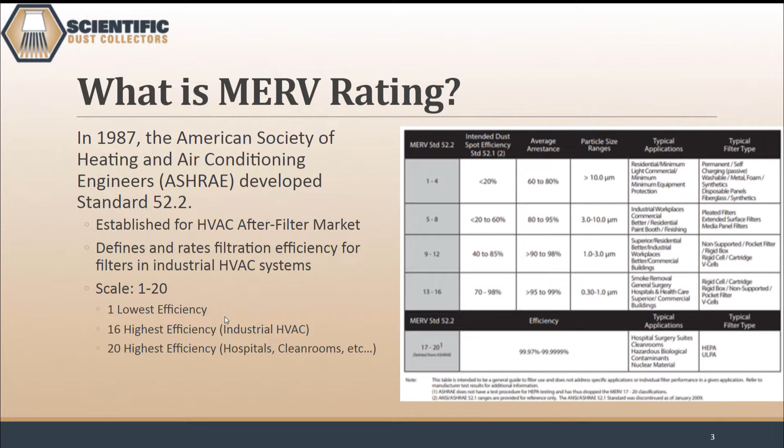In 1987, the American Society of Heating and Air Conditioning Engineers, also known as ASHRAE, developed Standard 52.2 and the Minimum Efficiency Reporting Value, or MERV rating. This standard was established for the HVAC after-filter market to define and rate the filtration efficiency for filters in industrial HVAC systems. Filters are rated on a numerical scale of 1 through 20, with 1 being the lowest efficiency and 16 being the highest efficiency for industrial HVAC.

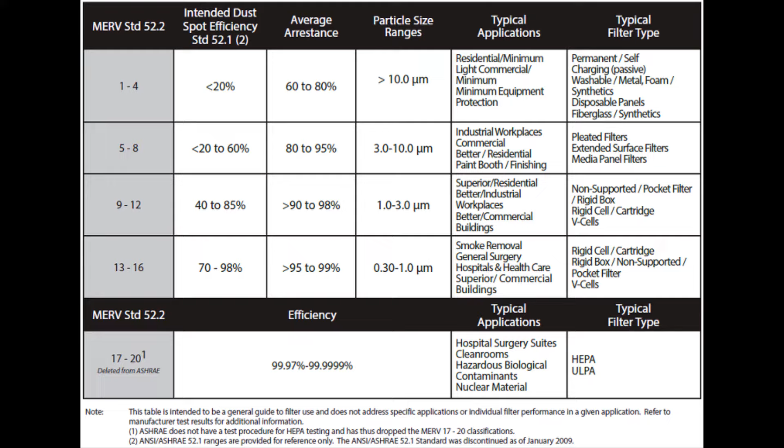Filter ratings above 16 are typically used in hospitals, clean rooms, and other hazardous areas. While the MERV rating is wonderful for the after-filter market, it has problems applying to dust collection.

In a pulse jet dust collector, filters are repeatedly pulse cleaned periodically with compressed air when a dust filter cake builds up on the surface of the filter media. The MERV rating exclusively focuses on filtration efficiency of a filter element under controlled laboratory testing. The testing is designed to mimic HVAC systems, and HVAC filters are not designed to be cleaned. They are designed to be replaceable.

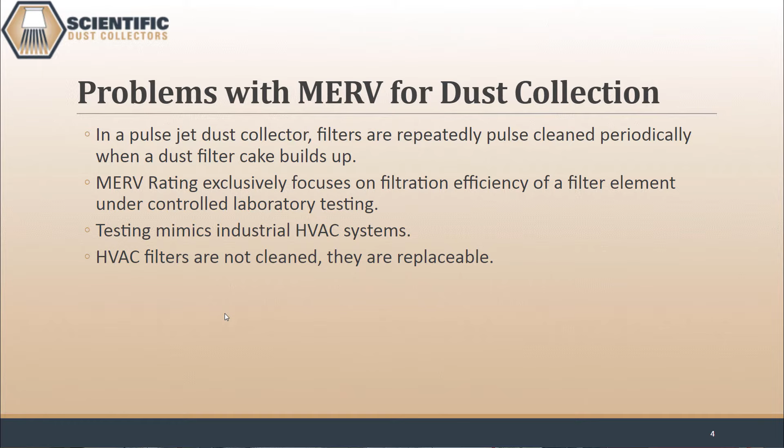On June 1, 2016, Standard 199 was published as a joint venture between ASHRAE and the American Standards Testing Institute, also known as ANSI. Standard 199's purpose was to provide a quantitative laboratory test method for determining the performance of pulse jet dust collectors using a known test dust.

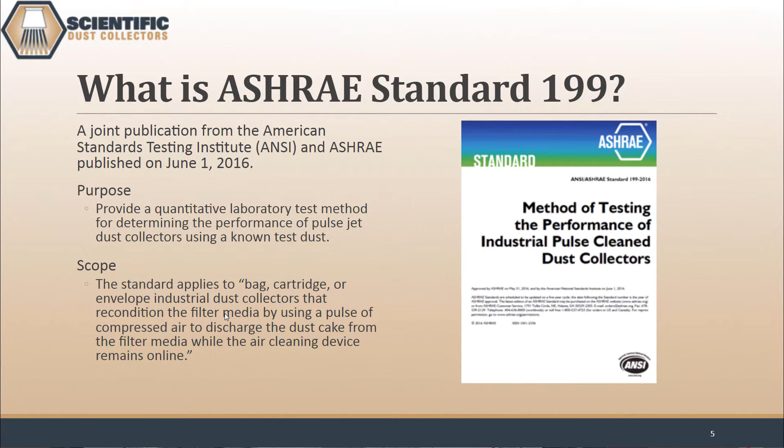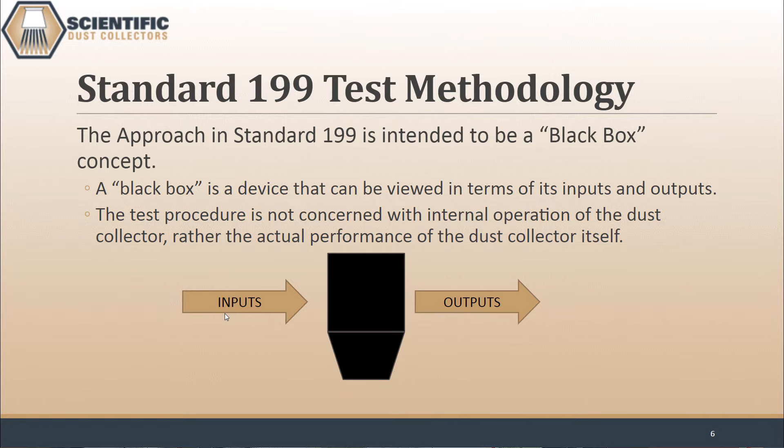Standard 199 applies to all bag, cartridge, or envelope industrial dust collectors that recondition the filter media by using a pulse of compressed air to discharge the dust filter cake from the filter media while the air cleaning device remains online. The testing methodology that Standard 199 takes is a black box concept, where the dust collector is viewed in terms of its inputs and outputs. The test procedure is not concerned with the internal operation of the dust collector, rather the actual performance of the dust collector itself.

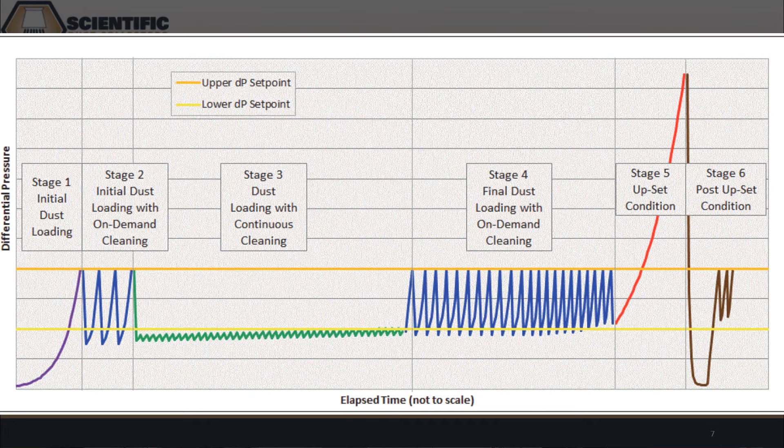The Standard 199 test procedure consists of 6 stages that must be completed continuously without stopping the airflow. Stage 1 is the initial dust loading. This stage loads the filters in the dust collector to a predetermined differential pressure, or DP, with the pulse cleaning off. Once the predetermined DP has been reached, the test enters Stage 2, which is the initial dust loading with on-demand cleaning. This stage turns the pulse cleaning on in the on-demand setting.

On-demand is when the cleaning frequency is determined by a high DP and a low DP. Stage 2 lasts for 4 hours. After stages 1 and 2, the initial dust loading has been completed. The following stages replicate real-world dust collector operation and performance.

Stage 3 is the dust loading with continuous cleaning stage. This stage changes the pulse cleaning frequency to a continuous operation based upon the pulse on-time setting. Continuous cleaning is the most common form of pulsing controller in dust collection today. Stage 3 lasts for 24 hours or until a predetermined maximum differential pressure is reached.

Stage 4 is the final dust loading with on-demand cleaning stage. This second, longer on-demand cleaning stage is intended to be the key performance test of the dust collector and lasts for 20 hours. Stage 5 is the upset condition stage.

This stage turns the cleaning system off and continues to feed the dust until the differential pressure reaches 10 inches of water gauge. As most dust collector owners know, and all dust collector manufacturers know, upset conditions can happen. The goal of Stage 5 is to evaluate how well the dust collector and the filters handle an upset condition of elevated pressure drop. It is during these times of elevated pressure drop that gaskets and filters can fail.

After the upset condition has been reached, Stage 6, the post-upset condition stage, begins. This stage reduces the airflow to 25% of specified airflow, pulses each filter 10 times, and then returns the airflow back to 100%. The goal of Stage 6 is to evaluate how well a system can recover after an upset condition. The dust feed and on-demand cleaning are then resumed for at least one cleaning cycle, and then the test is completed.

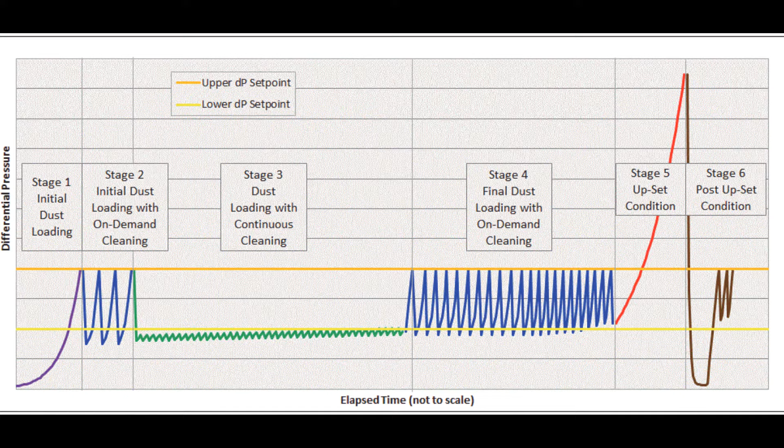The standard requires 2 types of emission monitors, gravimetric and photometric. Gravimetric is a simple tare weight analysis of an ePTFE membrane filter before and after each stage. The photometric sampler is a light-scattering aerosol photometer calibrated to the test dust and measures the size and quantity of the particulate emissions.

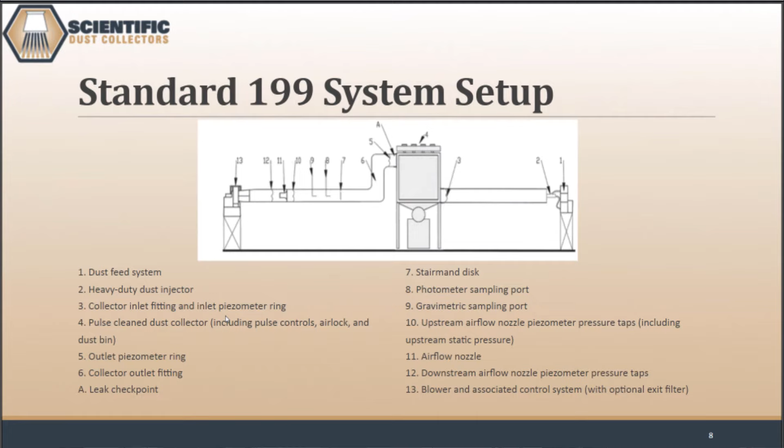The Standard 199 thoroughly details the various aspects of each item in the system test setup.

There is only one requirement that constrains the design of the pulse clean dust collector, and it requires that a maximum of 25% of the filters can be cleaned during any pulse cleaning event. This means the dust collector needs to have a minimum of 4 pulse cleaning valves so the results cannot be skewed.

The test dust specified shall be fine ground calcium carbonate, also known by the trade name Atomite. The particle size is 0.3 to 10 micron with a 3 micron median. The bulk density is 40 pounds per cubic foot loose and 65 pounds per cubic foot packed.

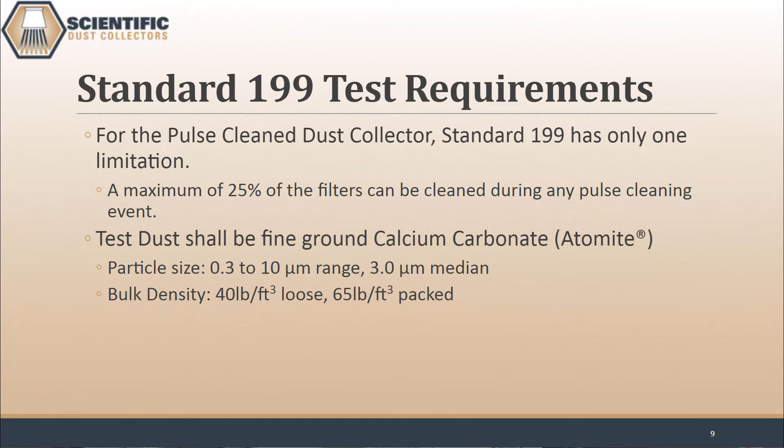A fun fact about the test dust and the testing at SDC is that when we completed the testing, we donated the test dust to a local park district for them to use as baseball diamond chalk, over 1,700 pounds worth.

While the testing process and stages are identified by the standard, many testing parameters are identified but not specified. The parameters include airflow measured in actual cubic feet per minute, or ACFM; filter media type and total surface area in square feet, which will also determine the air-to-cloth ratio; the pulse cleaning system settings from the high and low DP set points in inches of water gauge; off time between pulses in seconds; on time, or length of pulse, in milliseconds; and pulse cleaning system pressure in PSI.

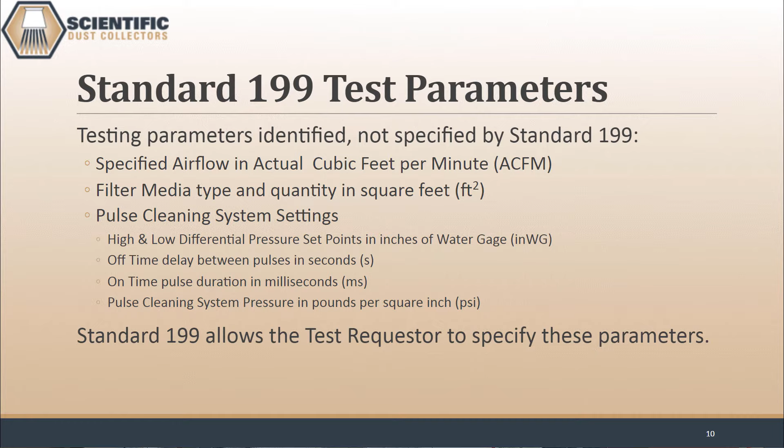The Standard 199 allows the test requester to specify all of these parameters. The results from the Standard 199 testing focus on 3 key parameters: emissions, differential pressure average, and compressed air consumption.

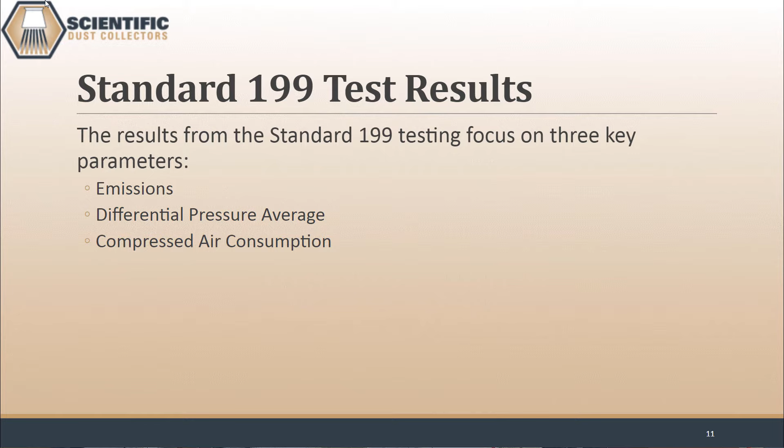Emissions data is critical to both the manufacturer and the end user for their environmental permitting and reporting. For the Standard 199 testing, the sizes of the particles are measured by the aerosol photometer that measures and records size-segregated mass fraction concentrations in the following sizes.

PM10 is coarse particles less than 10 micron in diameter, PM2.5 is fine particles less than 2.5 micron in diameter, and PM1 is very fine particles less than 1 micron in diameter.

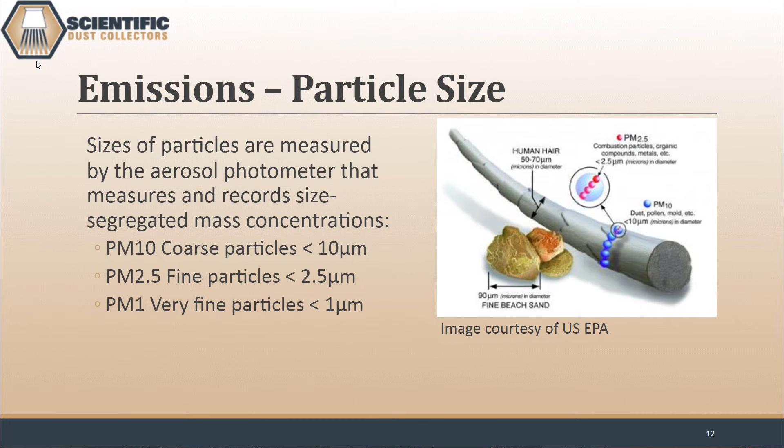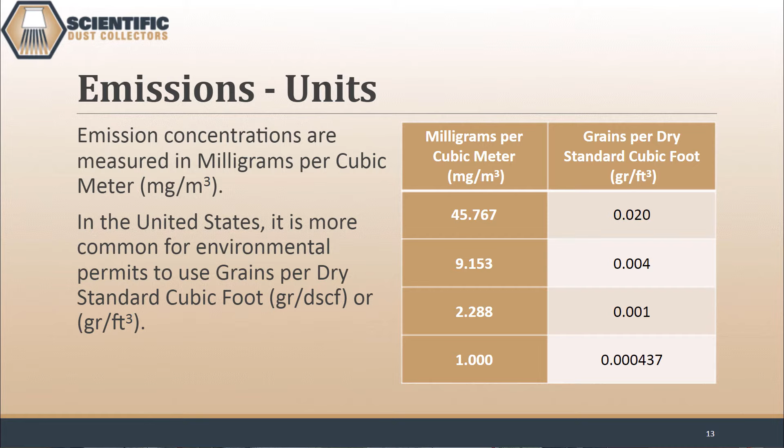The emission concentrations are measured in milligrams per cubic meter per Standard 199. In the United States, it is more common for environmental permits to be in grains per dry standard cubic foot. The chart here shows the conversion between metric and imperial units. 0.004 grains per dry standard cubic foot is the common emission standard in the U.S. and is equivalent to 9.15 milligrams per cubic meter.

Differential pressure is measured across the tube sheet of the dust collector in inches of water gauge. The tube sheet, also called the cell plate, is the physical barrier that supports the filters and separates the clean and dirty sides of the dust collector. The DP is the measure of the restriction the filters place on the system.

A system with a lower stabilized differential pressure will have lower energy costs realized in fan horsepower and will typically have longer filter life.

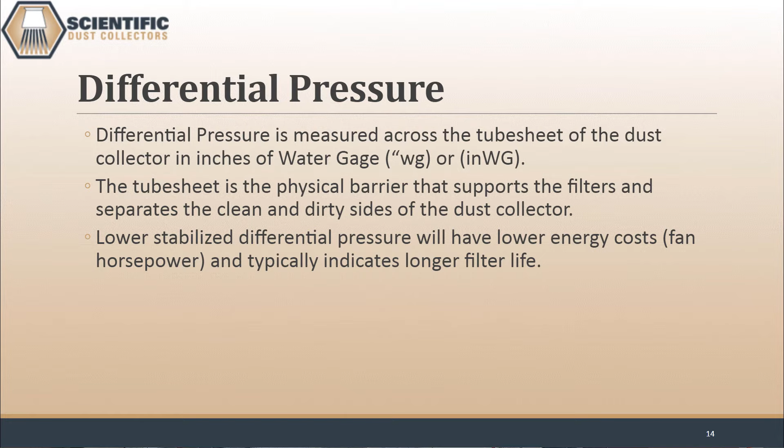Compressed air consumption is a function of the number of pulses of the cleaning system and is measured in cubic feet. For each stage, the total number of pulses is recorded and multiplied by the average air volume used per pulse. Standard 199 derived an equation creating a dimensionless ratio using the data from the last 4 hours of stage 4. This equation takes into account the total compressed air used over the amount of air filtered during the last 4 hours of stage 4.

This dimensionless ratio indicates the effectiveness of the pulse cleaning system. When comparing dust collectors, the dust collector system with the superior cleaning system will report a lower ratio value.

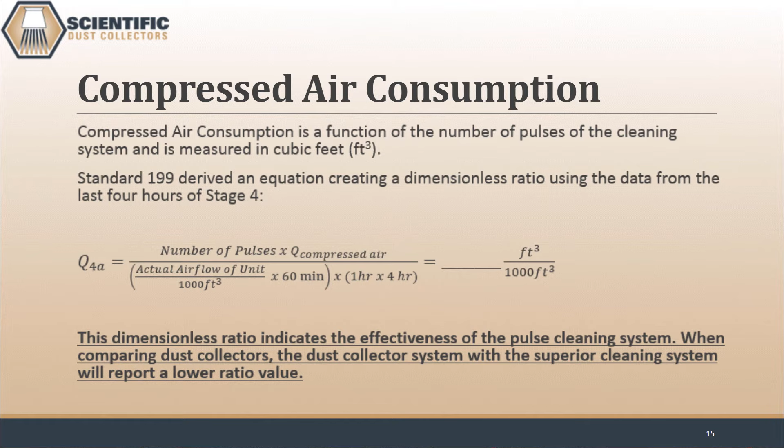The Standard 199 also contains a report template that requires all fields to be completed and is intended to be a brief summary of the full-scale test. The report is a 3-page review that contains a macro examination of stages 1 through stage 6 and a close examination of stage 4, including a focus on the last 4 hours of the stage, which is intended to be the key performance test of the system.

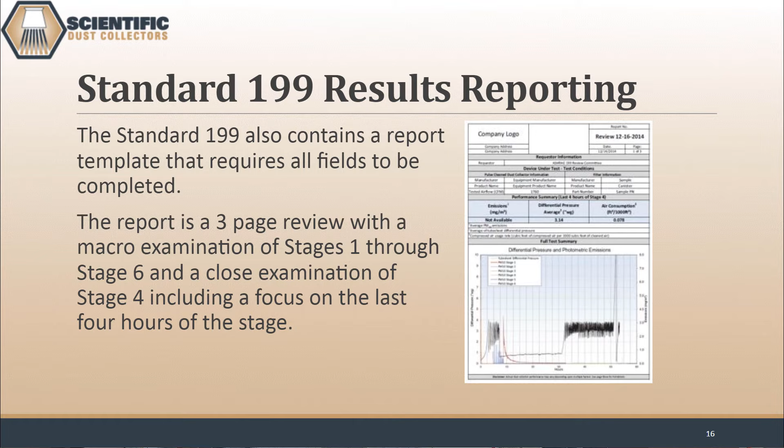SDC completed the testing in its own in-house lab that was specifically built for the ASHRAE 199 standard. To SDC, it is important that the testing be completed on a dust collector from our standard product catalog and not a special dust collector designed specifically to fit and function for the standard.

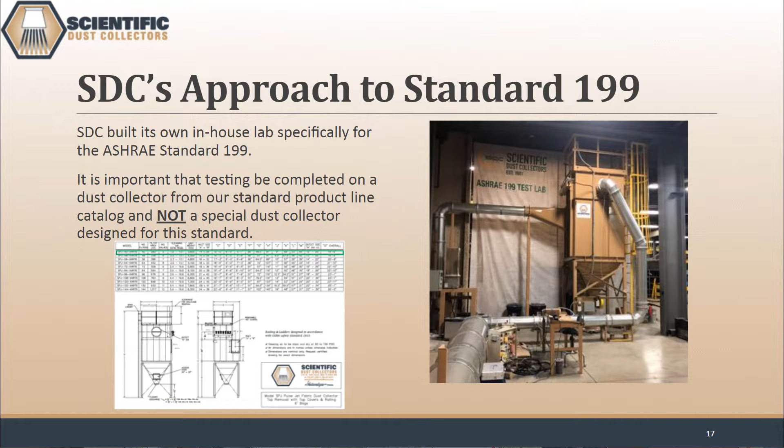For our SPJ PulseJet baghouse line, there are 2 types of designs: top removal filter and bottom removal filter. The top removal filters are more widely used, and therefore SDC selected the smallest standard collector from our top removal product line, the SPJ 40 X4 RT6.

After selecting the baghouse model to test, SDC determined the Standard 199 test parameters. The SPJ 40 X4 RT6 has 5 pulse valves and meets the 25% maximum cleaning requirement. SDC selected industry standard singed polyester bags to operate at a higher air-to-cloth ratio, choosing 3000 CFM for an air-to-cloth ratio of 10.6 to 1, which is standard for SDC but double the industry standard of 5 to 1 for this application.

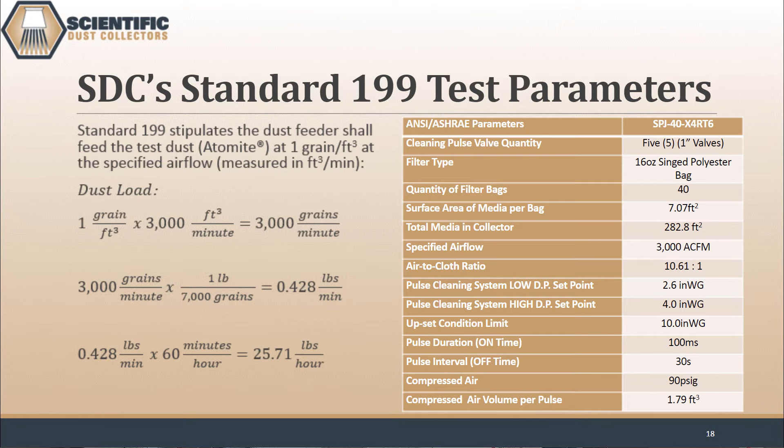SDC then determined the pulse cleaning system settings and, using 3000 CFM, determined the amount of dust required to meet the requirement of 1 grain per cubic foot at the specified airflow from Standard 199.

On January 22, 2020, SDC started Test 1 of the ASHRAE Standard 199 test procedure, and on January 24, 2020, SDC concluded Test 1. The following will be an in-depth analysis of all stages of the Standard 199 testing and a look at the results using the Standard 199 report template.

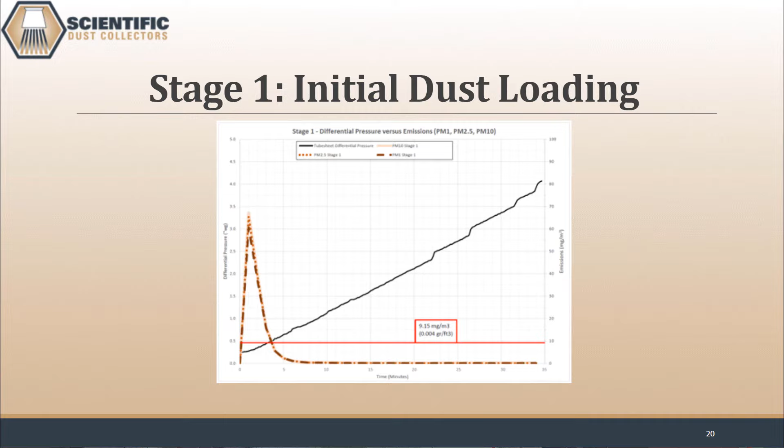The initial pressure drop for Stage 1 was 0.24 inches of water gauge using clean bags at 100% airflow before any dust was fed into the system. Once dust was introduced, there was an initial and brief spike in emissions, expected since the pores of the media are wide open. However, as the pressure drop slowly increased and the filter cake formed, emissions dropped quickly. Stage 1 lasted about 35 minutes.

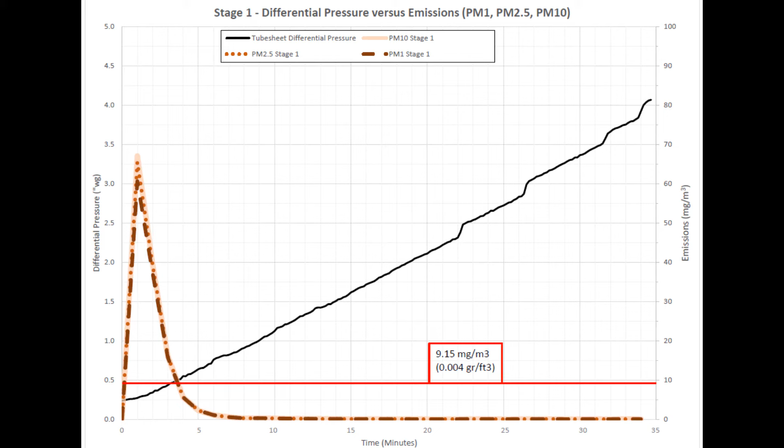As mentioned earlier, the emission standard in the U.S. is to be less than 0.004 grains per cubic foot, or 9.15 milligrams per cubic meter, which is represented by the red line.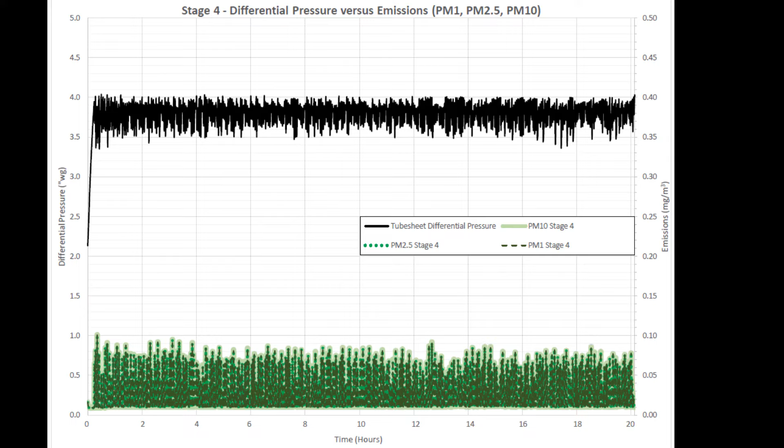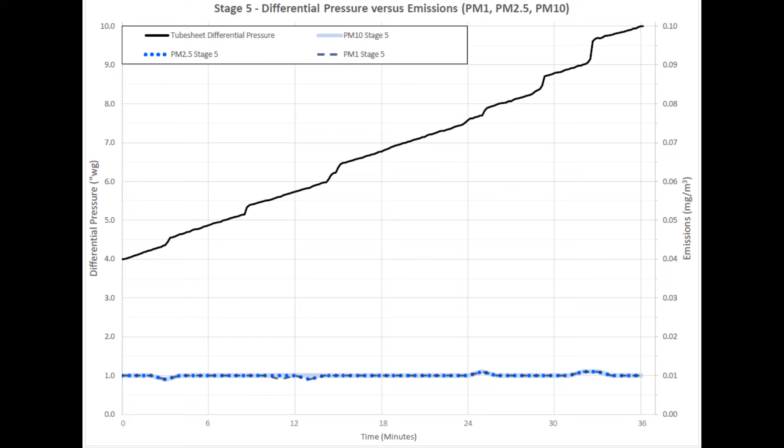The goal of Stage 5 is to evaluate how the dust collector and filters handle an upset condition of elevated pressure drop. Here, the SDC SPJ baghouse was able to endure the 10 inches of water gauge upset condition with ease, and there are no signs of dust leakage or filter failure. This stage lasted about 36 minutes.

In Stage 6, after 10 complete cleaning cycles, the DP dropped from 10 inches of water gauge down to 0.74 inches of water gauge at 100% airflow. Testing resumes, and there is a relative spike in emissions up to 1.36 milligrams per cubic meter, almost 1 order of magnitude less than the 9.15 milligrams per cubic meter standard. On-demand cleaning is resumed for 1 cleaning cycle, and then Stage 6 and the test conclude.

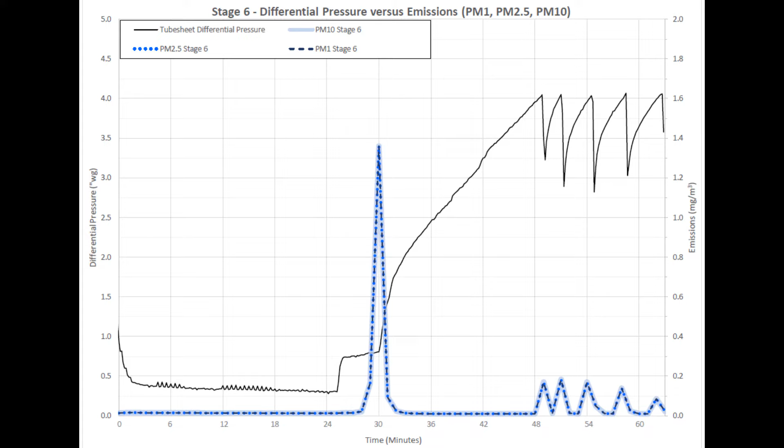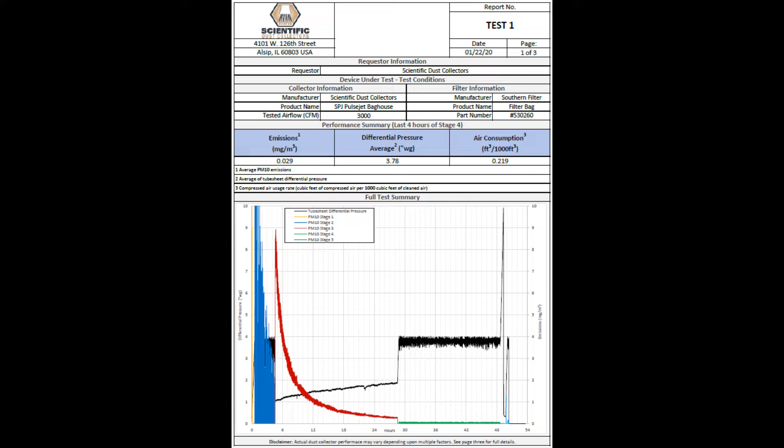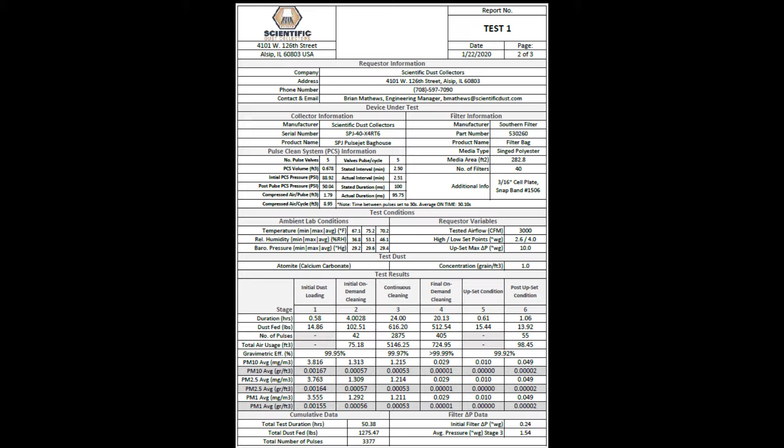Now on to the Standard 199 test report. On page 1, there's identifying information and a Stage 1 through 6 chart of differential pressure and emissions over time. On page 2, all of the test requester information, system parameters, test conditions, and test results are summarized. On page 3, there are different charts examining differential pressure, compressed air usage, and emissions, along with any comments from the tester.

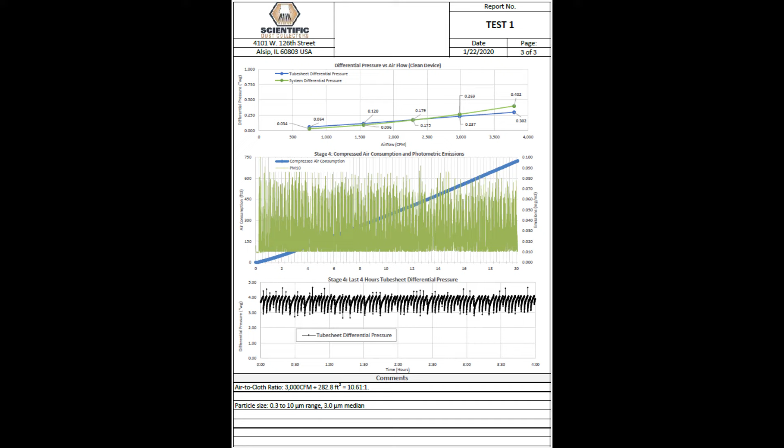To ensure SDC met the Standard 199 protocol, SDC sought a third-party review. SDC Laboratory and ASHRAE 199-2016 testing protocol have been audited and certified by Blue Heaven Technologies on September 17, 2020. Blue Heaven Technologies is an industry leader in filtration testing with their own Standard 199 lab, led by Robert Burkhead, who serves as a ranking and voting member on the ASHRAE Standard 199 Project Committee.

In conclusion, SDC's higher air-to-cloth ratio design is different. Typical air-to-cloth ratios for fine powders like the Standard 199 test dust for generic baghouses are 5 to 1. For the Standard 199 testing, SDC operated at 10.61 using our standard design features: supersonic nozzle cleaning, high side inlet, and wider bag spacing.

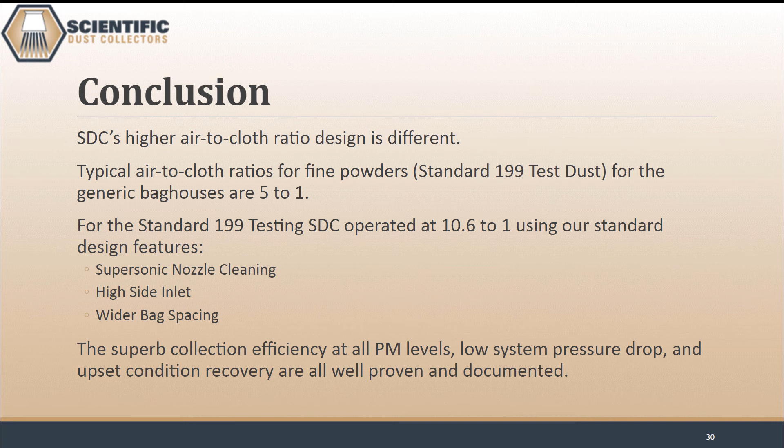Superb collection efficiency at all PM levels, low system pressure drop, and upset condition recovery are all well proven and documented. For more information on ASHRAE 199 and to get a copy of the summary or full test report results, visit our website www.scientificdustcollectors.com.